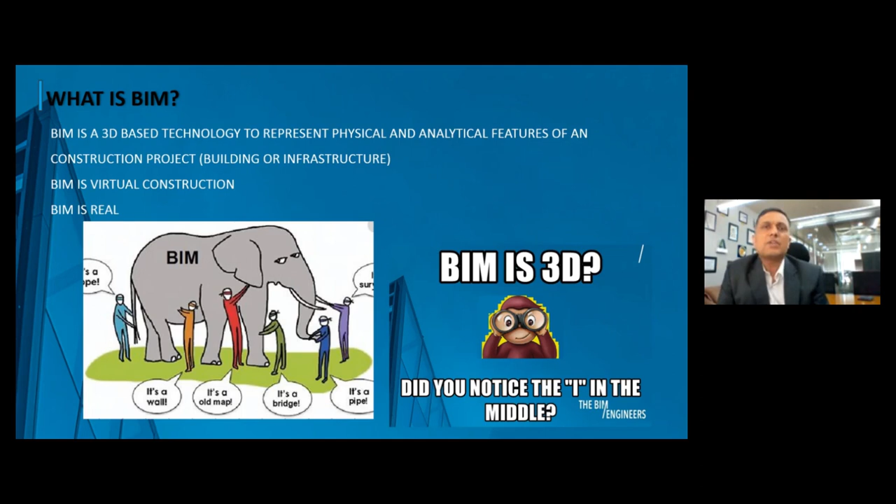They can reap different benefits, but it will bring benefit for sure from the initial tender stage to the design coordination, clash detection, quantity verification, bill settlement, manufacturing, supplying, procurement, till the as-built and facility management stage. Very briefly, I'll cover the benefit of BIM. One, better design, better coordination, improved site supervision, clash detection coordination, value engineering.

Quantities are very precise, detailed quantity extraction, including the fittings and elbows and accessories. Everything comes into the Excel sheet very perfectly. And it's not 99% accurate, it is 100% accurate. It looks a little awkward, but that is the reality in BIM. It's garbage in, garbage out. What you see is what you get with BIM technology.

Another benefit is cost control, quantity verification, facility management, as-built, laser scanning, and you can use BIM for virtual realities and as-built update and digital twins. How better outcome? BIM is a collaborative platform where all the stakeholders are working together and they are talking to each other and working on the same platform where data is stored on internet and everyone is using the same data.

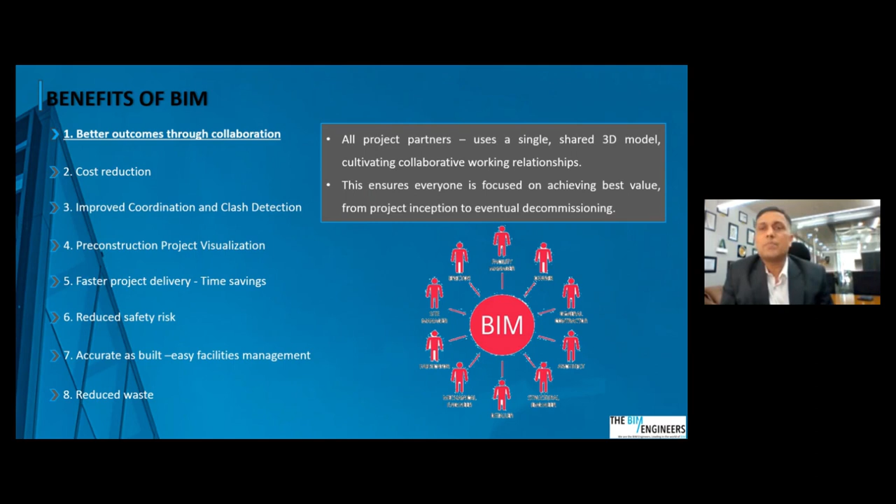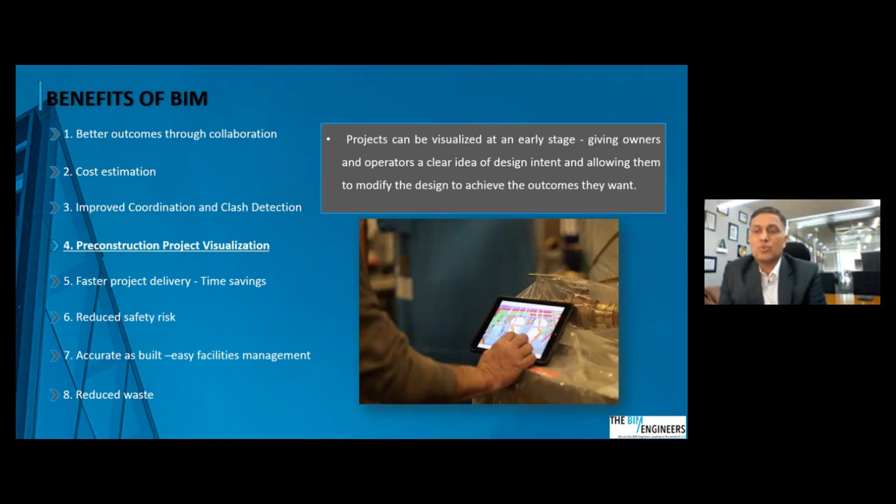Cost reduction, because quantities are accurate and you can save lots of time and cost in terms of clash detection coordination, renderings, walkthroughs, visualizations, project faster time frame because you have resolved most of the design related challenges and the construction related coordination issues or clashes beforehand.

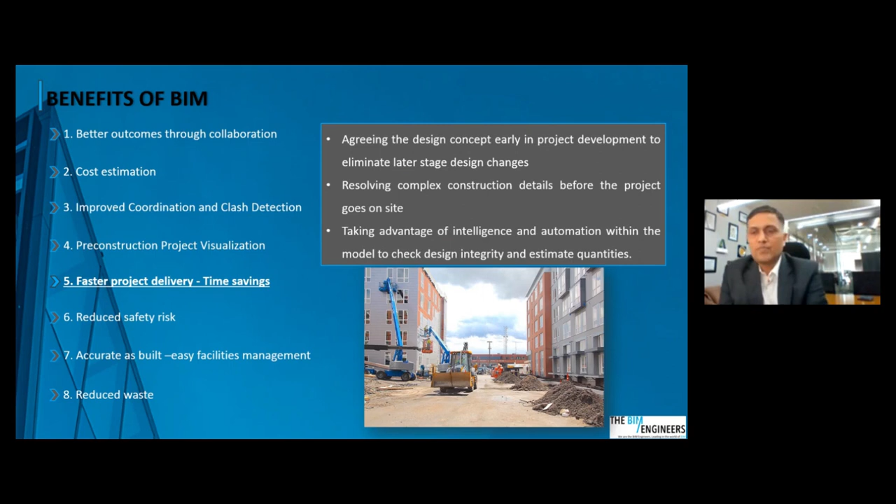So once you go on site, it's like the same construction which you have finished in computer, replicating the same construction process on site. So definitely, if you have done it successfully in the computer construction phase or virtual construction phase, your site will go smooth. Risk is reduced and the safety measures are enhanced. As-built and facility management, wastage can be reduced.

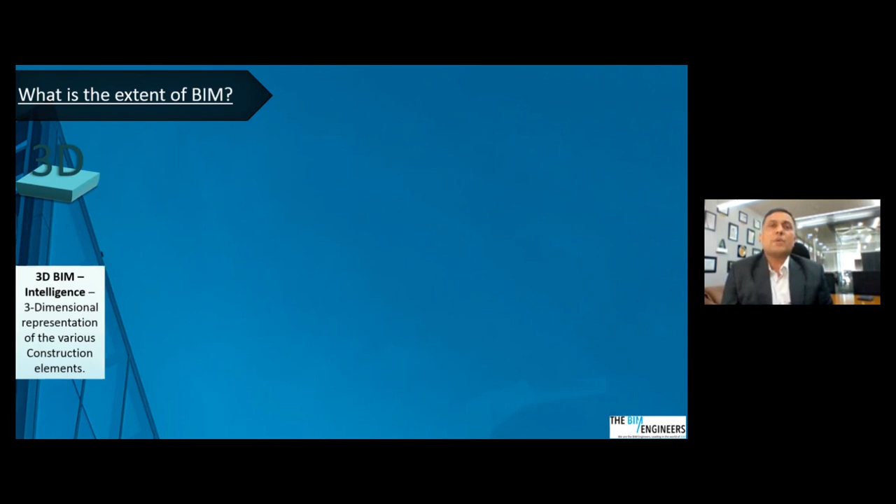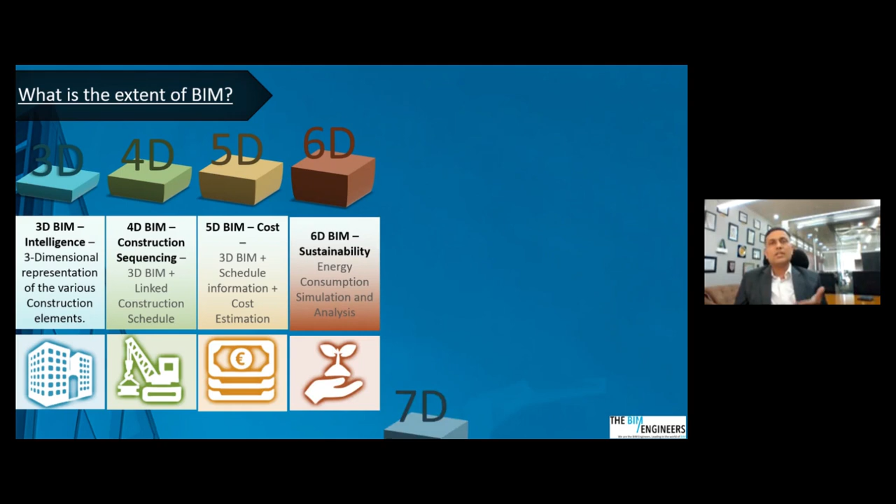What is the extent of BIM? Most of you might have heard about 3D, 4D, and 5D. 3D is the basic BIM. You have X, Y, and Z direction. 4D, when you add the timeline, the 3D getting constructed based on the time frame, weekly, monthly, fortnightly, yearly, how we do the construction or how the building activities will progress. That is called fourth dimension.

Fifth dimension, when we add the quantity or the cost element to the 4D. So you will see the building getting constructed, associated quantities and the cost also. It goes up to sixth dimension where we can do lots of green building analysis, shadow studies, heating, cooling, load analysis, solar analysis, lots of simulations, wind tunnel analysis.

Going up to seventh dimension where you can use the same BIM model which started with 3D, 4D, 5D and 6D, and can go up to facility management, as-built, life cycle management for future expansion, extension, and renovation of the building.

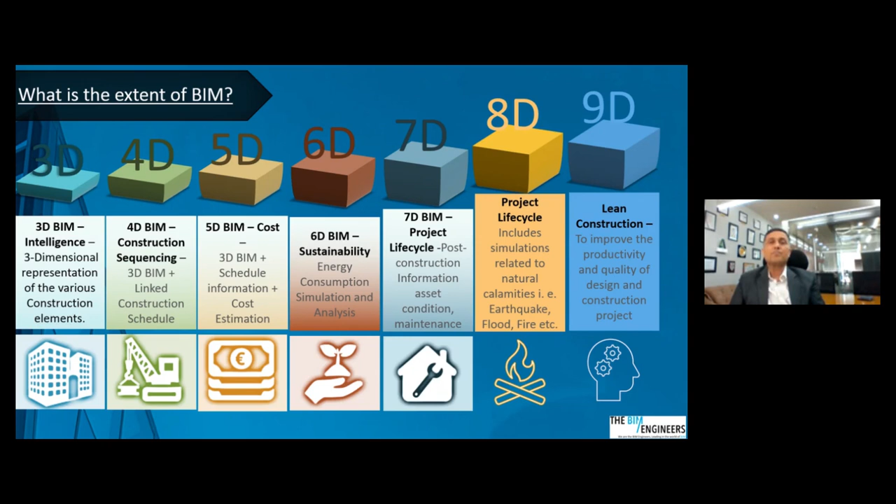The next level of BIM we are implementing goes up to eighth dimension, where you have all the natural calamity simulation, earthquake, fire, flood; you can simulate them using the BIM platform. So you can avoid those natural calamities in a virtual environment, and it comes very handy for larger or taller building constructions or design. Ninth dimension, where you use lean construction methods to make your building more efficient, more intelligent, save time, cost, and efficiency is increased.

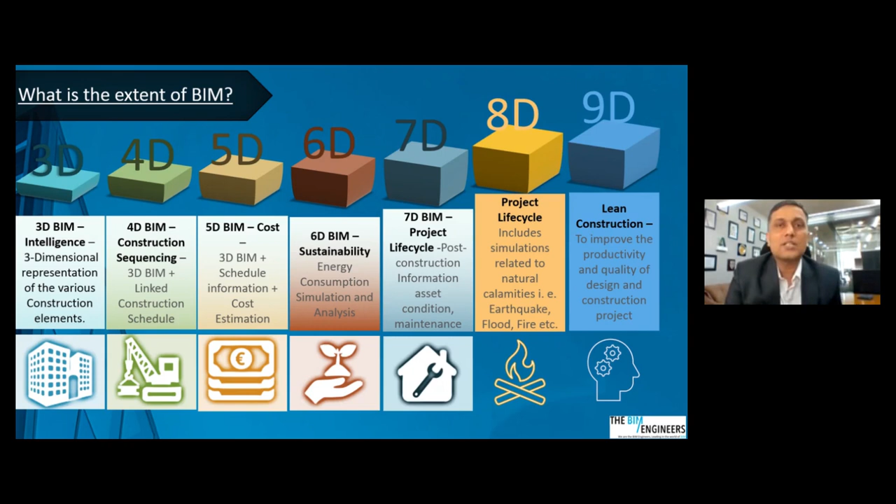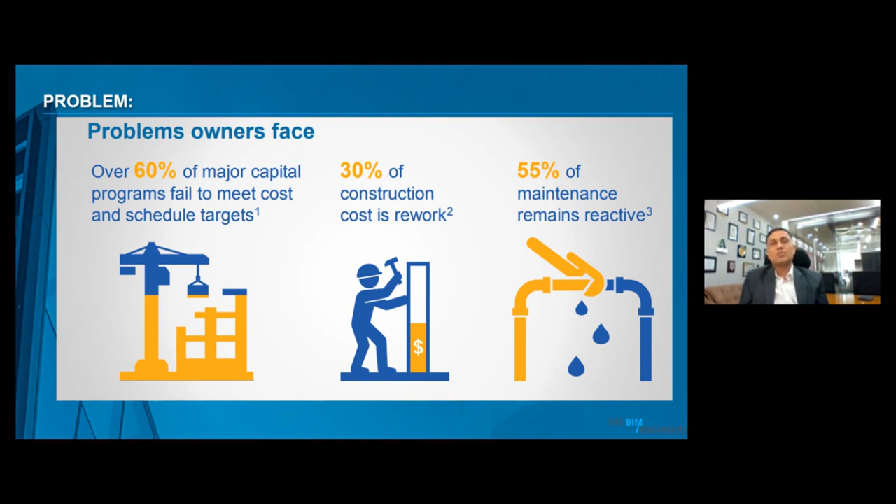You see lots of problems faced by the design consultant and the owners. First is the schedule targets. Projects generally get delayed, lots of rework happening on construction sites, and maintenance and facility management is reactive. When we see the problem, then only we react. BIM technology is proactive, you can predict and avoid the problems from happening rather than reacting once it starts happening.

Benefit of BIM comes into various formats. Documentation and drafting errors, grammatical and spelling errors can be reduced almost 61%. Rework, meaning design change, can be reduced significantly. Construction cost - yes, BIM has case studies which prove that BIM can bring benefit to the rail and infrastructure metro projects, almost bringing a saving of 22 to 25%. And project time duration can be reduced by almost 18 to 20%.

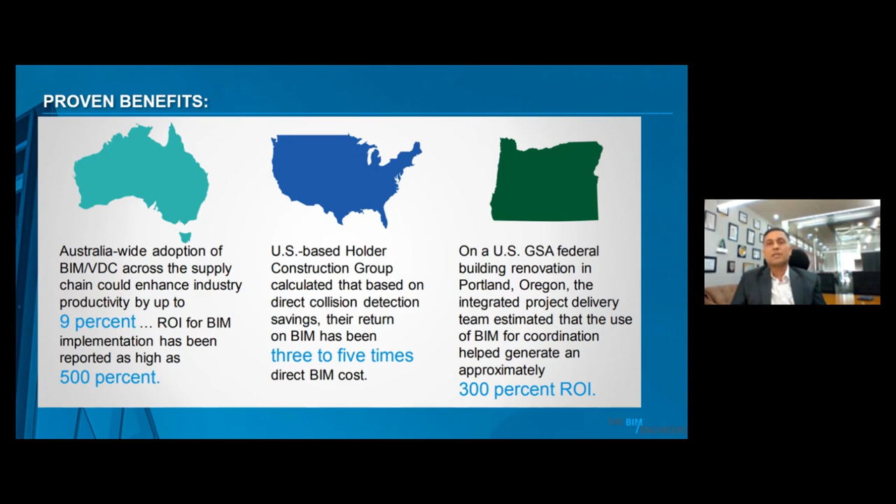What major benefit comes out of BIM on metro and rail projects is coordination and efficiency. Design commitment of projects is improved. 3D renderings change the way you work on the construction sites. Value engineering by saving the reduced labor cost, installation time, and safety concerns are addressed. Constructability issues save time in getting the answer of request for information between different design consultants.

Project management - BIM gives you that platform where you can track and monitor the progress of the project very efficiently in terms of construction activities, coordination, clashes, quantities, bill verification. So you have a virtual dashboard where you can literally manage multiple projects going simultaneously using the BIM platform.

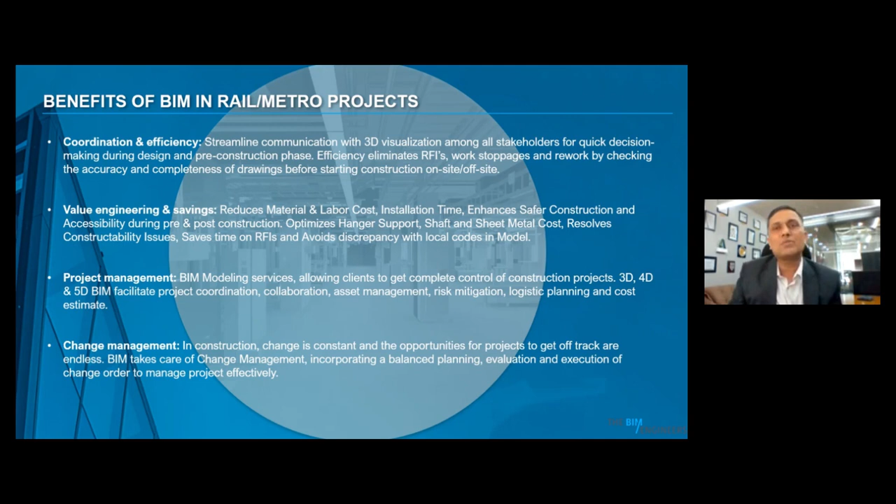Change management - any change happens, BIM can give you the side benefit or side effects of those changes. If you do any design change from, let's say, stone to tile, you will see the benefit in terms of quantities, cost, coordination and weight - everything instantly.

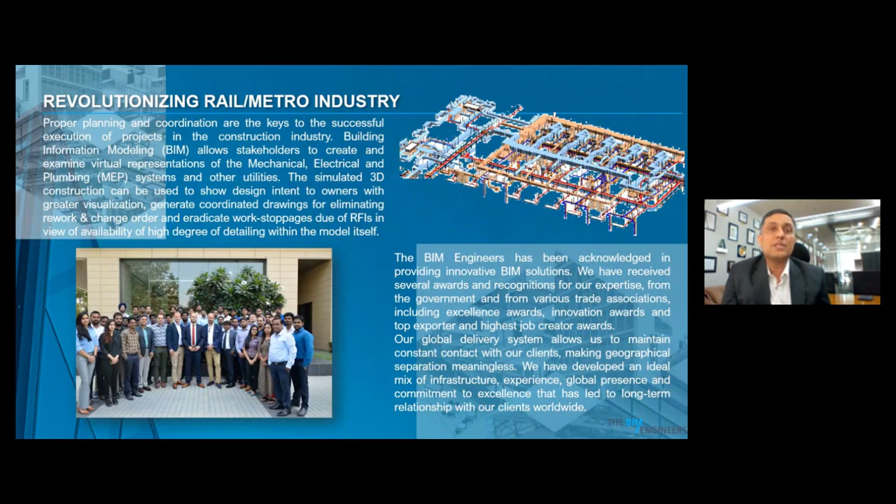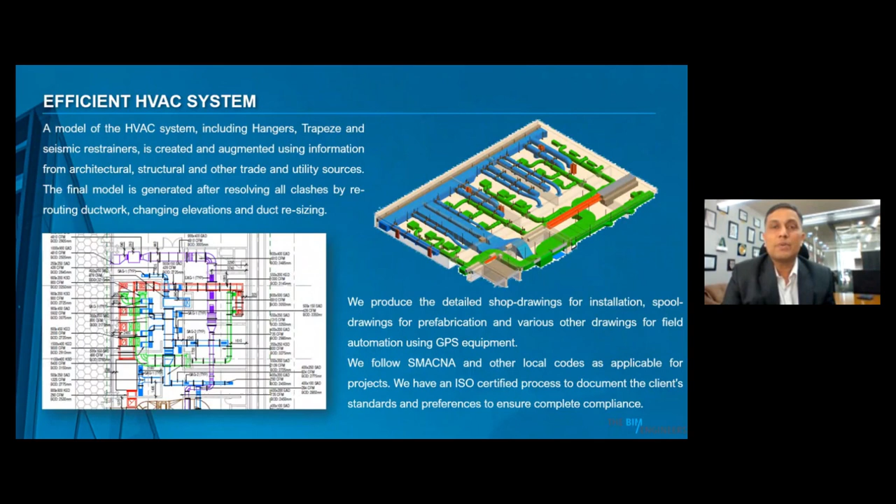So in a nutshell, BIM and my organization's BIM engineers are revolutionizing the rail, metro, high speed and infrastructure industry. It is bringing lots of benefit from 2D AutoCAD to 3D BIM environment where you have efficient heating, ventilation, air conditioning systems. It can reduce the over-design problem in our industry by 30%.

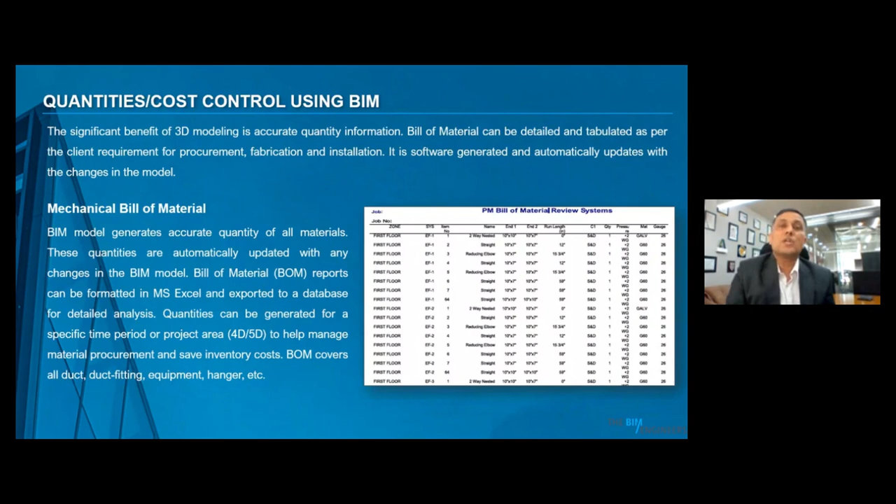Energy efficient buildings through better orientation, better use of material, intelligent plumbing systems using BIM coordination - quantities and cost using BIM are very advanced, whether it's mechanical, electrical, civil, structural, architectural, or interior. All quantities coming out of BIM and they are talking to each other.

That means BIM is a collaborative platform where your architecture, civil structure, facade fabrication, rolling stock and rail systems, ELV systems, IT systems, and electrical - they are all talking to each other in a BIM collaborative environment.

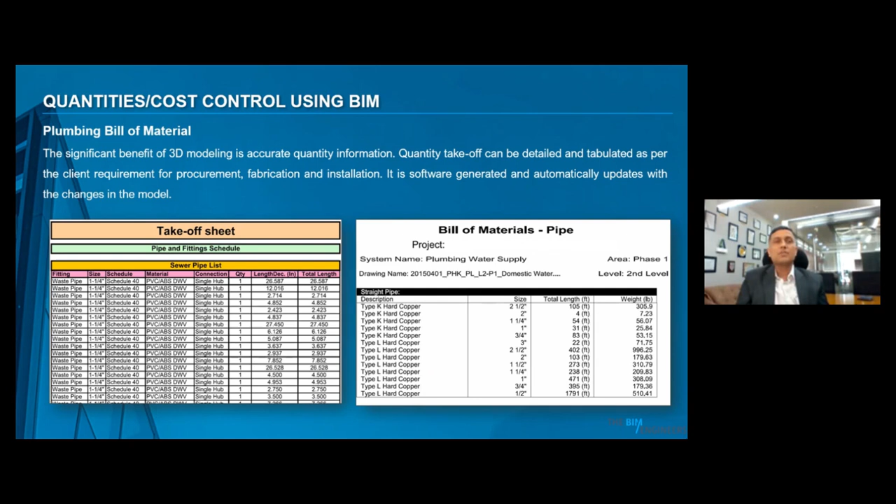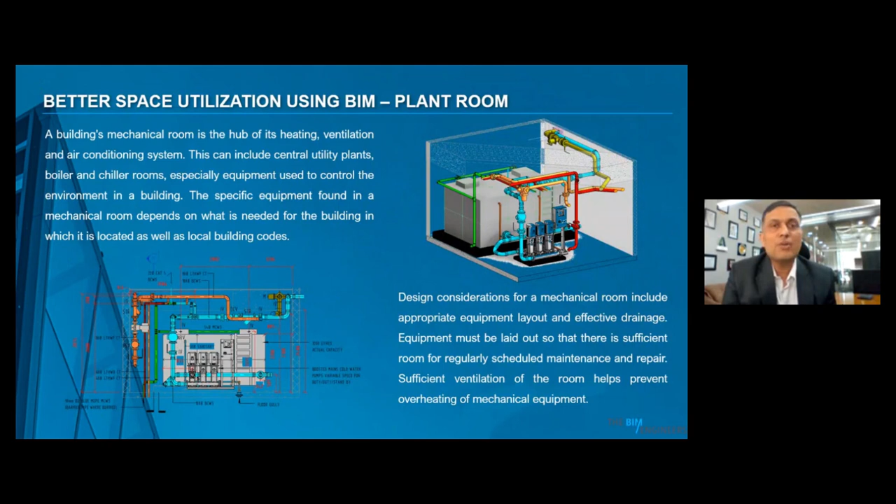You see some examples of firefighting system design, better space planning and space utilization because metros are generally in congested spaces. You have to manage your available space very efficiently, and BIM helps in the perfect planning, orientation, spacing and routing of mechanical equipment, plumbing pipes, air conditioning systems, ventilation systems and other facilities.

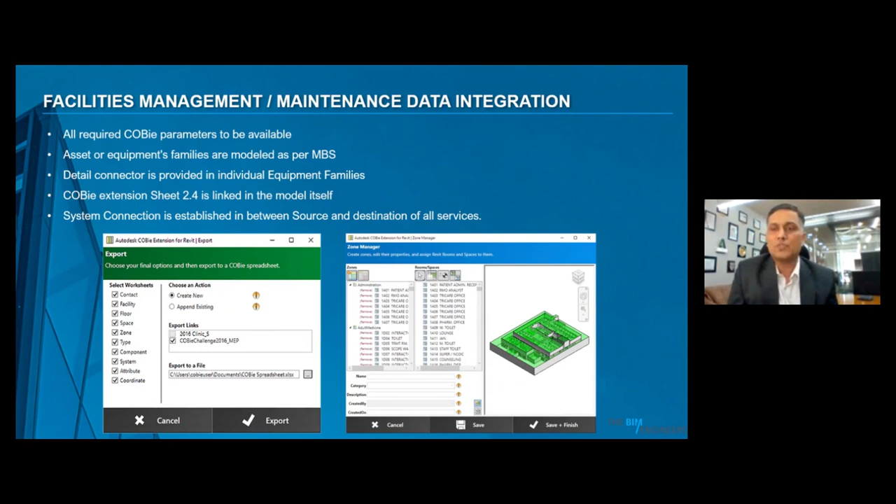Facility management - it's not just about construction, the operation and maintenance of the rail and metro project gets very easy using the BIM environment. Prefab - because as I said earlier, metro and rail projects are generally in congested spaces within city boundaries, so you have less space to do the construction on site. So prefab is the way to go.

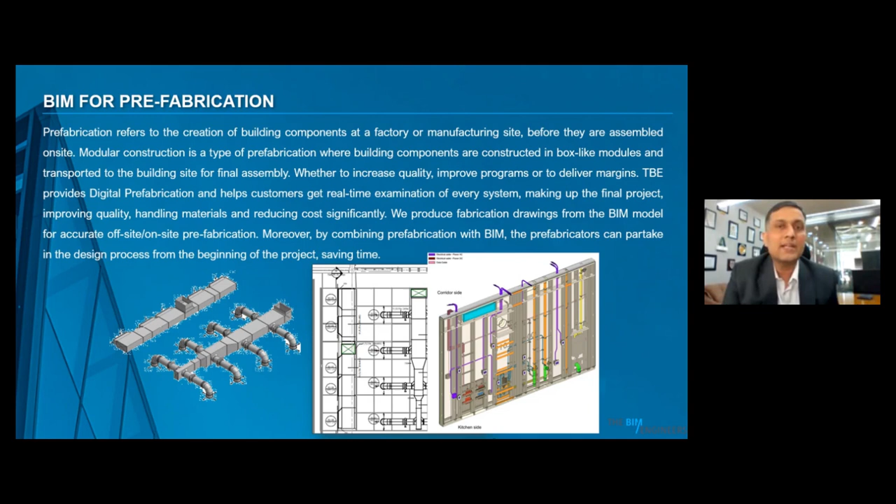Most, about 80%, of the metro viaducts are now being prefabricated. BIM is the technology which gives you that tool and that efficient measure to plan the pre-construction or prefabrication, not only in terms of civil or structural, but also for mechanical, electrical, plumbing, and firefighting systems.

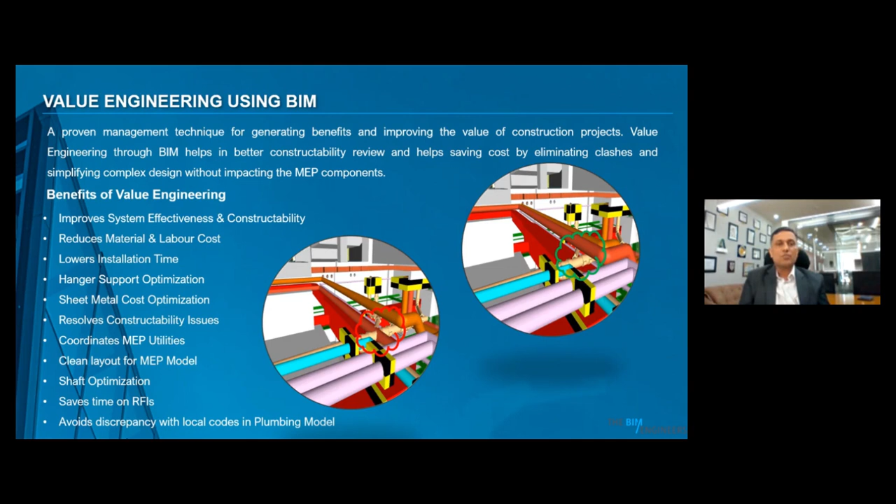BIM can bring lots of value engineering like improved system effectiveness, reduced cost, better cost optimization, coordination between mechanical, electrical, plumbing, civil, structural, architectural services, shaft optimization, save time on RFIs, and avoid discrepancies within different systems.

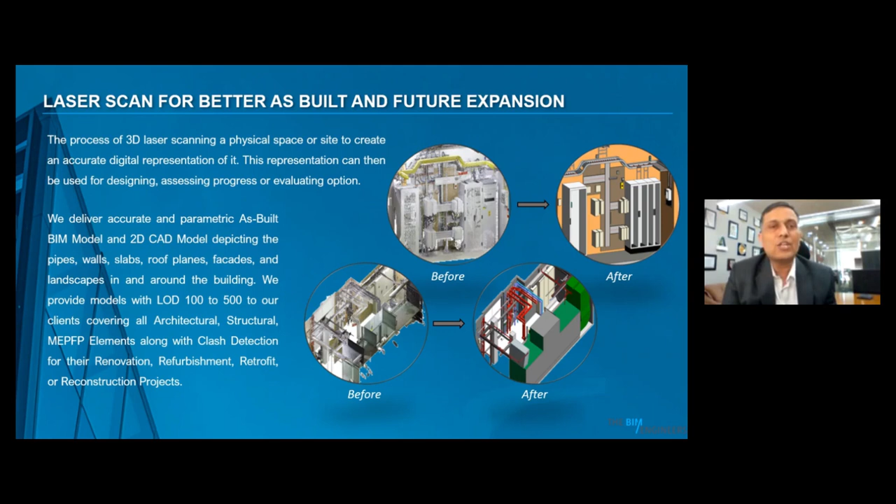If you have heard about laser scanning, that is also getting very popular now - even your iPhone 12 has laser scanning capability. You have the accurate as-built information available, which was a big challenge in our industry before.

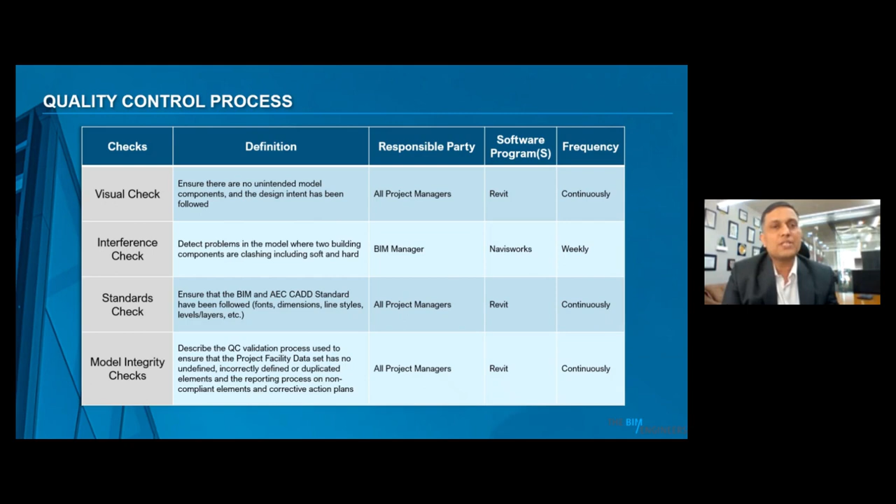Some quality control processes - we manage the BIM quality by visual check, software-based interference checks, standard compliance with local government guidelines, and model integrity checks compared against international BIM standards. Our team is efficiently managing lots of projects. I'll show you some of the case studies towards the end, but this is the typical workflow.

The BIM Engineers is one of the leading organizations in the world when it comes to implementing building information modeling on metro, rail, high-speed rail, PRT, and LRT projects. We have done projects in more than 70 countries, with more than 350 architects and engineers working on global BIM projects.

Our company, the BIM Engineers, in a very short span of time has been recognized by various international forums and organizations. We have been awarded many accolades in terms of emerging BIM companies for airport, metro, and infrastructure projects which we have received in last few years for implementing BIM. We have also been presenting BIM and its benefits at various international seminars, exhibitions, and organizations.

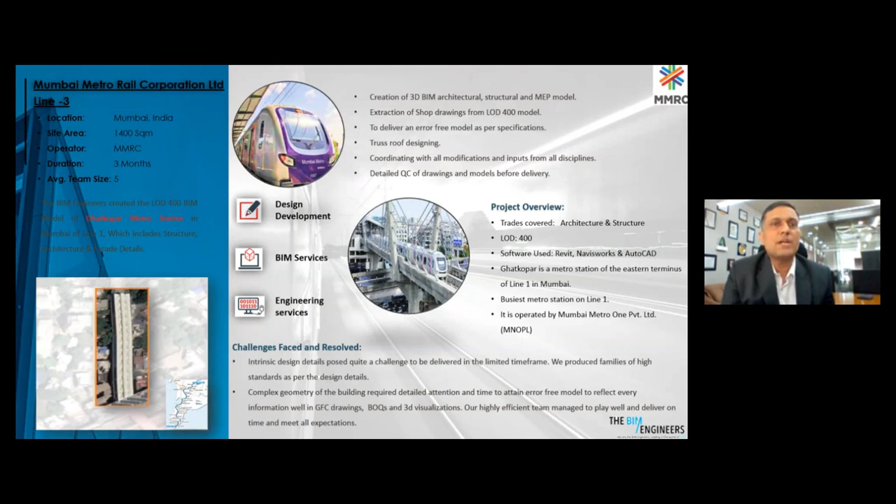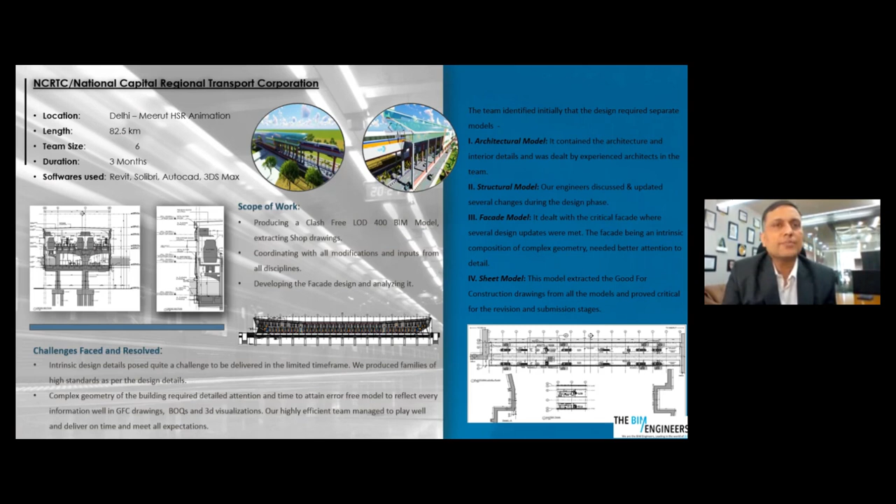One such project where the BIM Engineers have implemented BIM is Mumbai Metro Line Phase 3. Then the National Capital Regional Transport Corporation in New Delhi, between Delhi and Meerut, that's a high-speed rail. Also Singapore MRT, Tai Seng facility, where we have implemented BIM on the depot project.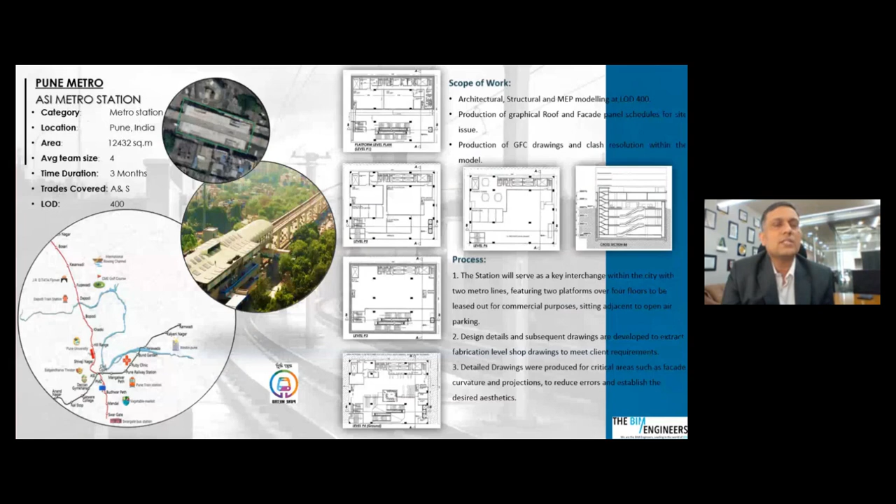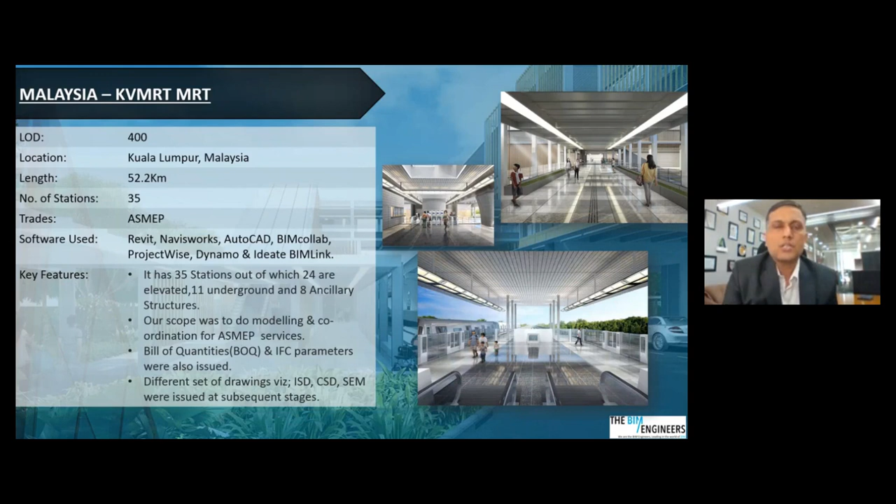Guldhar Metro Station is another part of the NCRTC line. Pune Metro, and Malaysia KVMRT, a 35 station, 52.2 kilometer long metro line, where we have implemented architectural, structural, mechanical, electrical, plumbing, fire, facade, clash detection, coordination, renderings, walkthroughs, virtual realities, and shop drawings.

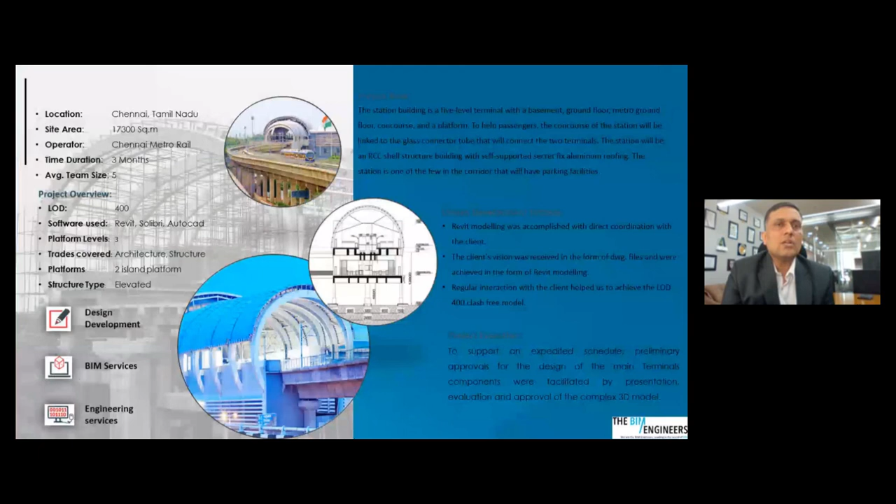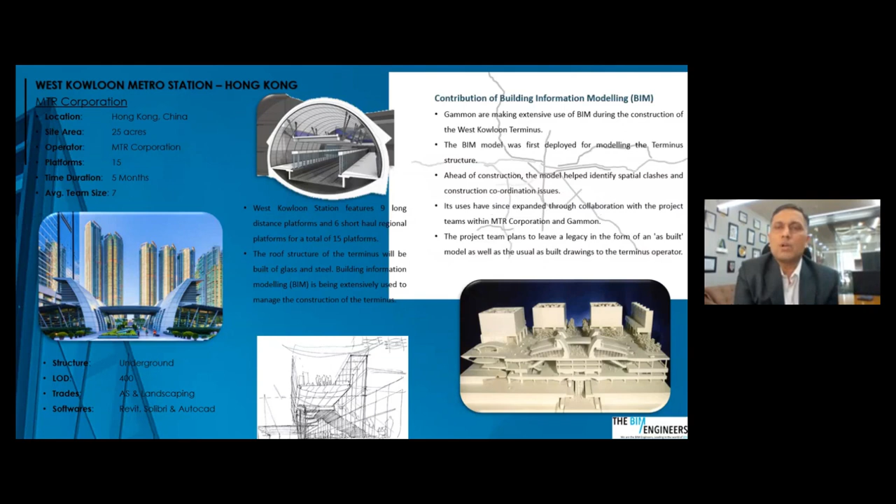A snapshot of the Chennai Metro project and West Kowloon, the world's largest underground metro station with 7 levels, 4 below ground and 3 above ground, with a total of 15 platforms on those levels, connecting mainland China to the island of Hong Kong. A very challenging and complex project.

Eurostar in Rotterdam, we have done lots of high-speed rail in Europe, and this is one of them. Deutsche Bahn, German rail, we are currently implementing BIM for many of their lines, existing as well as new plant construction. In UK, we are doing high-speed rail.

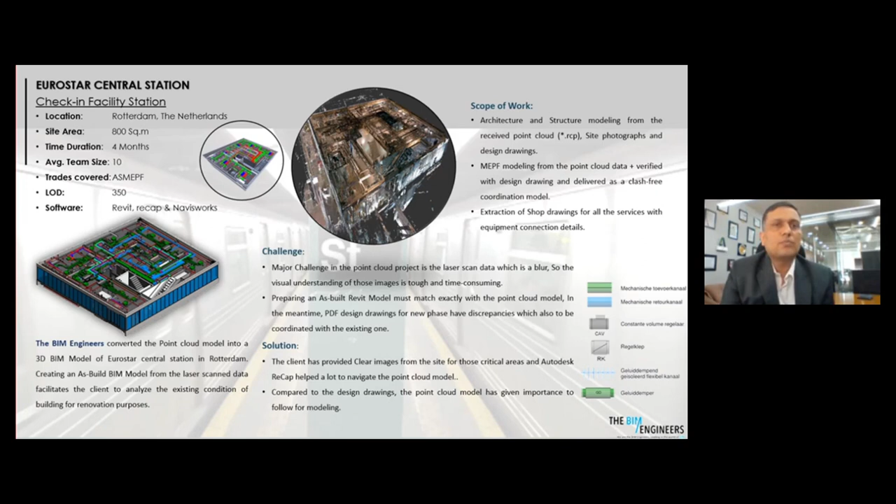HS2, from London to Birmingham. Delhi Metro Phase 3 and Phase 4, the BIM Engineers is responsible for implementing BIM for stations and corridors.

The value addition our team brings in terms of metro and rail projects is direct access and maintenance clearance. The standardization of BIM elements helps in saving time and accuracy, and we can do coordinated drawings.

The drawings coming out of BIM are flawless. You will not find clash or coordination issues, drafting mistakes, grammatical mistakes, or spelling mistakes in the drawings coming out of the BIM environment, because BIM is a garbage in, garbage out technology, based on a Revit instant platform.

Through BIM, the construction sector is undergoing a digital revolution, and we are at the front line of that revolution. BIM is a new way of working, where we approach construction with another mindset. To understand this, we need to see that with BIM, everything is connected.

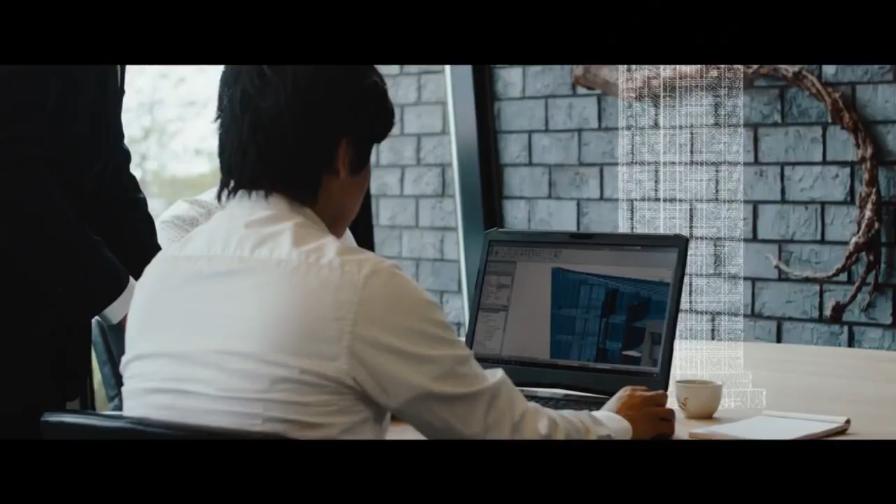BIM brings together all of the information about every element of a building in one place. BIM makes it possible to access that information for any purpose in the building's life cycle. But it is even more. BIM is information modeling, information management, and process management in a team environment, with the same standards for everyone involved.

The central point is no longer a 3D model, but a database with access for everyone. The team can consist of members from different companies working together on one project. BIM creates value from the combined efforts of people, process, and technology.

It is a cost-effective method of setting up a new project and being flexible and open for both the client, engineers, and contractors.

Because of BIM, we are no longer limited by human borders. The BIM Engineers work on projects worldwide. We use BIM as a future-proof solution to design and invent new ways to shape our surroundings and build the cities of the future.